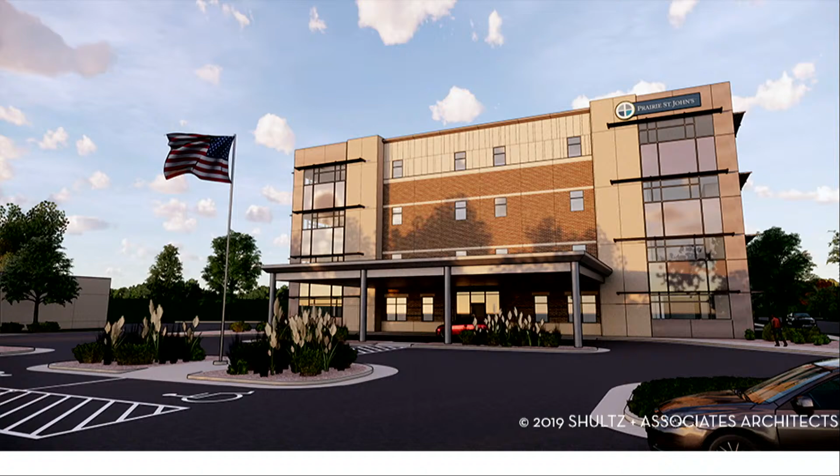Here's the rendering. It's close to this look right now. We still have that front piece to finish. So this is our wrap up front canopy. We're just adjusting a little bit to the approach. We'll move a little to the west.

Just a little bit about Prairie St. John's to set the stage here. Prairie St. John's is a fully licensed 132 bed behavioral health facility, serving adults and children. We also have partial hospitalization for our outpatient programs, and we've also grown our sustainable or supportive housing. We've opened up a second building for that, for people enrolled in our outpatient program. The vast majority of our patients are from the local Fargo-Moorhead region, and we serve Minnesota, North Dakota, and also bordering states.

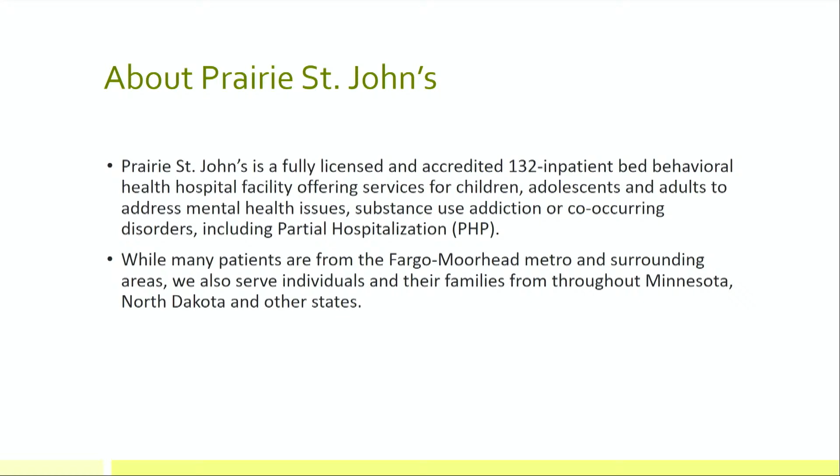So to get into what we were requested to visit about, we're proud to report on the demolition materials that we've been able to recycle. I'm sure many on this committee are interested in this and know some of these facts, but 30% of overall waste worldwide can be attributed to construction waste. So by diverting this from landfills, it certainly adds life to the landfills. The primary materials we recycled on site were masonry, asphalt, concrete, and metals.

And there was some salvage of equipment that was past its useful life, but found new life elsewhere, such as a couple older generators — the demolition company was able to move those on to new homes. As you can see, the benefit for us was not needing new materials hauled in. We had considerable fill that was needed, required to bring our parking lots up to an equal grade to the building.

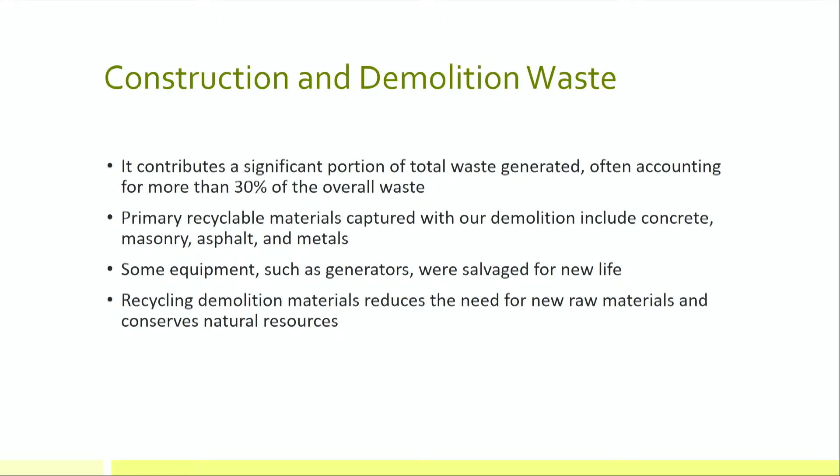So I'll go through a few slides that folks have driven by and watched as we've started to demo this spring. Much of this, there's quite a bit of abatement that happened last fall. So when springtime came, we hit it pretty hard in early April.

You'll see that they start to separate on site. They'll start to separate the metals, and there's a combination of crushing. They'd bring down the big slabs. A lot of it was poured in place slabs. Bring it down, crush it, and then pull out manually with their equipment, pulling out metal.

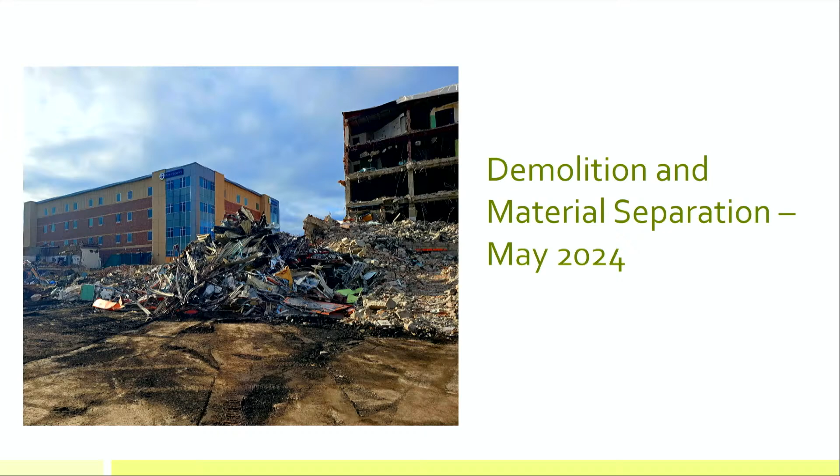And here you start to see that we're down to the lower foundation. We've got a large pile of metal up front here.

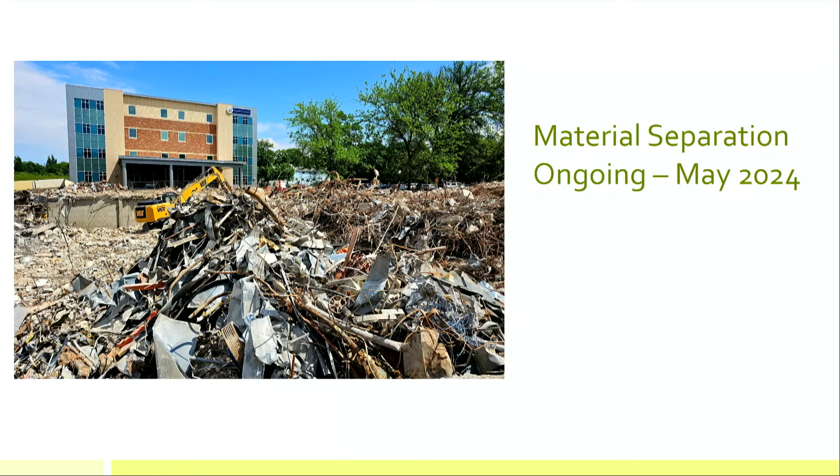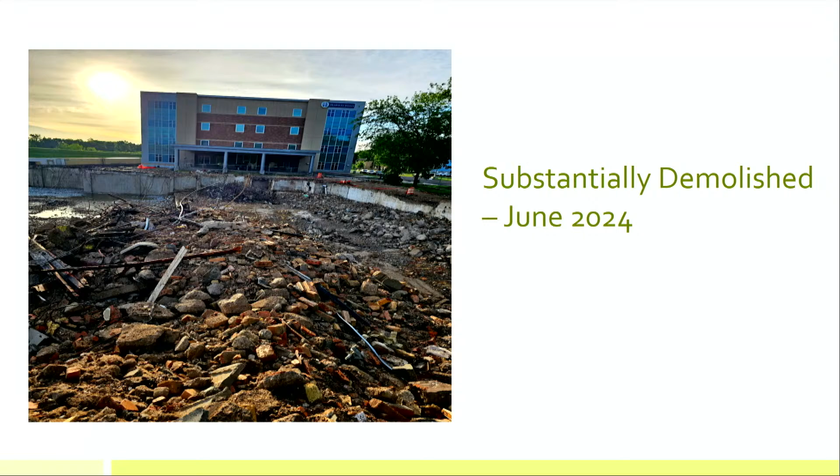We were considered substantially demolished in the latter part of June. There was a little bit of a lull in time as we waited for some of that crushing equipment that you see actively on site now.

Some of the materials, it was fun to work with the contractor to tally up what these ended up, and some of it's still growing. You'll drive by now, there's still metals that are being pulled out of the crushers. So there's quite an extensive pile of metals out there right now.

The asphalt equated to 4,100 tons of asphalt. That's been crushed, and that's actually starting the next phase - I apologize, that's the next phase where the concrete is wrapping up in the next week.

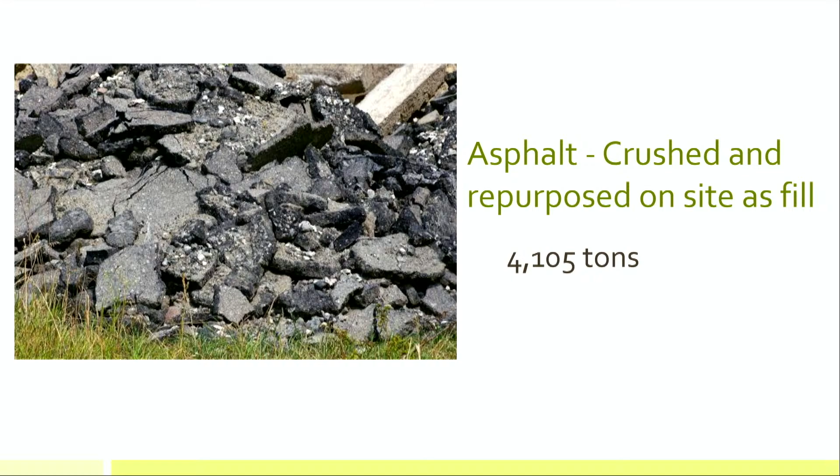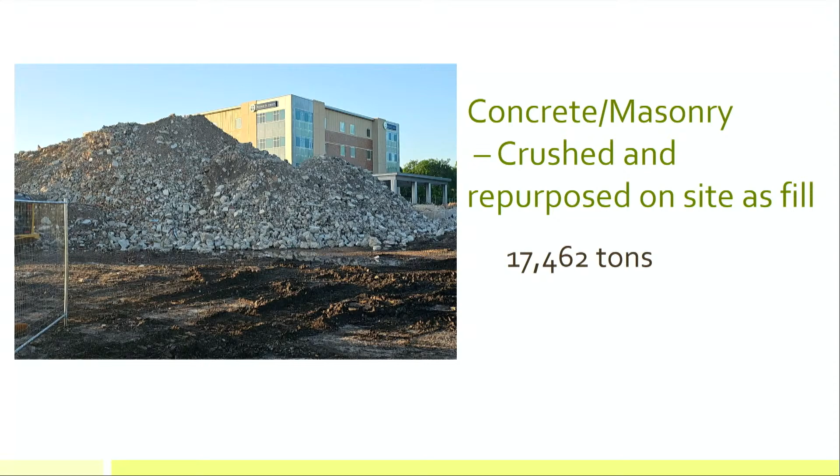This is a relatively recent photo. It looks similar today. The pile's getting bigger, but at some of the depth of that fill - this is the crushing and the active dozers getting the compaction in there, and we're at 96, 97% compaction. Some of that depth is at 12 feet up towards the canopy, where the foundation was and where the basement was. So it gets to be quite a depth.

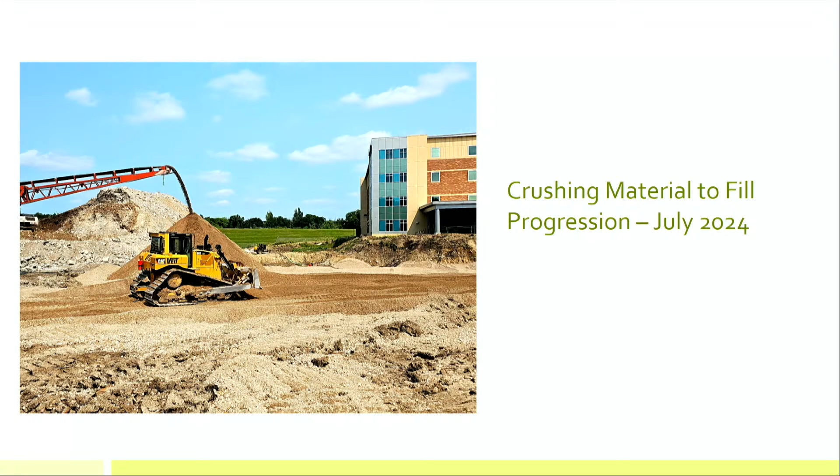Some of the additional impacts you try to quantify: 568 estimated semi-trucks to haul if we would have hauled that off-site. Nearly 23,000 tons of construction demo out of there. Like I said, some of that's still growing, with some metals being hauled out in the next couple of weeks.

Landfill diversion extends the useful life of that. Reduced labor - high demand, there's a lot of construction going on in town. We're in a massive shortage of drivers. Road wear - obviously alleviate the wear and tear on that.

And those 568 trucks, that's one-way traffic. So that's going two ways to and from the site, so you can double that. And then also just the delivery simply of bringing new materials, raw materials back to, if it would have been class 5 gravel, whatever product we would have used. So that would have been additional traffic back to the site.

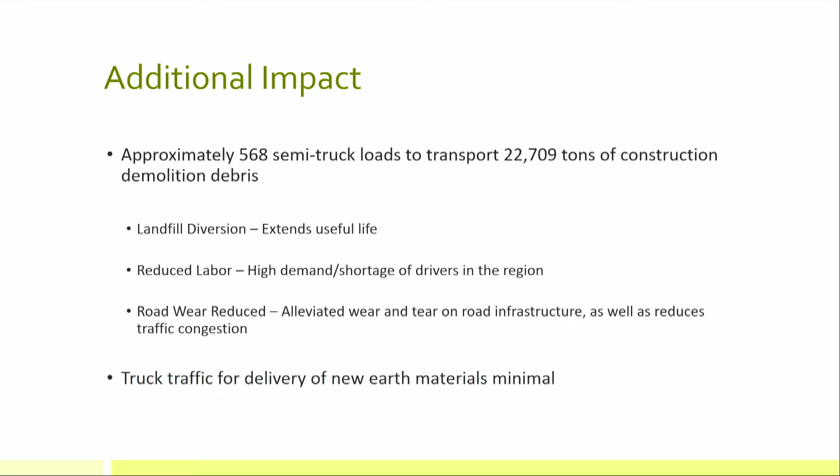So that concludes what I have. If anybody's got any questions, I'll take them.

I may or may not have them. I could come back.

Matt, what were your financial considerations when you're weighing whether to recycle and reuse or to just throw to the dump? I was not there during some of that initial - I've only been with Prairie for 4 months, so I had missed out on that really front end of that.

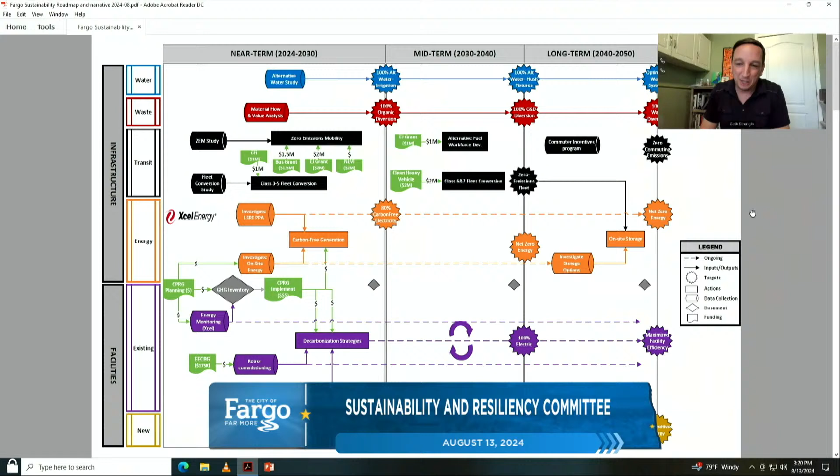Yeah, great, thanks so much, Bruce. I really appreciate it. And really, what a fantastic project that Matt and the Prairie St. John team have going on there. Kudos all around on that. And that is a great example of taking advantage when an opportunity presents itself.

As Bruce said, we can also look forward strategically, so we can start to plan the actions and steps the city can take to try to realize these sustainable outcomes we've mapped out. What I wanted to do today is walk through this roadmap you're looking at on the screen. As Bruce said, attached with the packet is a narrative explanation, but I want to take this time to walk you through it so you can gain an understanding of what this is saying. If you have questions, you can read back through the narrative, and we can address any questions as they come up.

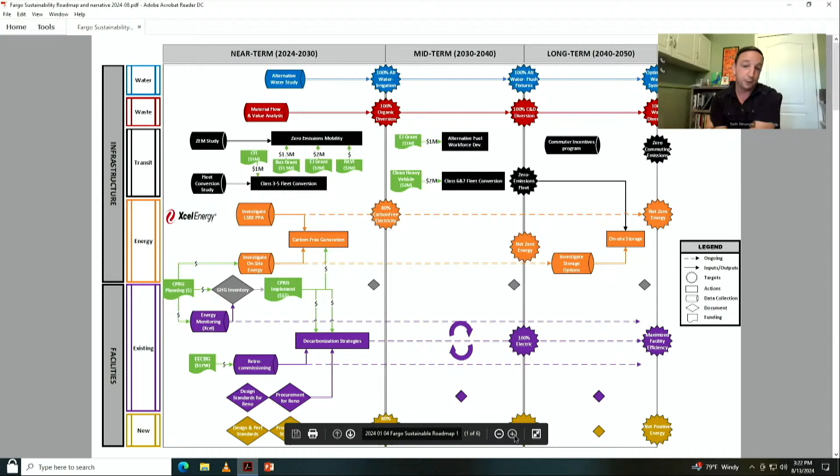So what I first want to do is orient you to how this is set up. If you move from the left-hand side of the screen over to the right, you'll notice that in the far left we're categorizing the city's operations, the elements the city is involved in where there's an opportunity for sustainability. We're breaking that into two categories: one is infrastructure and the services that infrastructure provides, and the other is looking at facilities that are city-owned and public facilities.

As we move left to right, after thinking about infrastructure and facilities, there are different subtypes within there. There are various areas of the city's infrastructure with opportunities to improve sustainability performance: water, solid waste, transit and transportation, and energy. When we think about facilities, we can split those into your portfolio of existing city facilities, and also new projects designed moving forward, or standards to put in, like the lessons learned at Prairie St. John. If there were lessons to carry forward into city policies or codes, that would be looking at new forthcoming facilities.

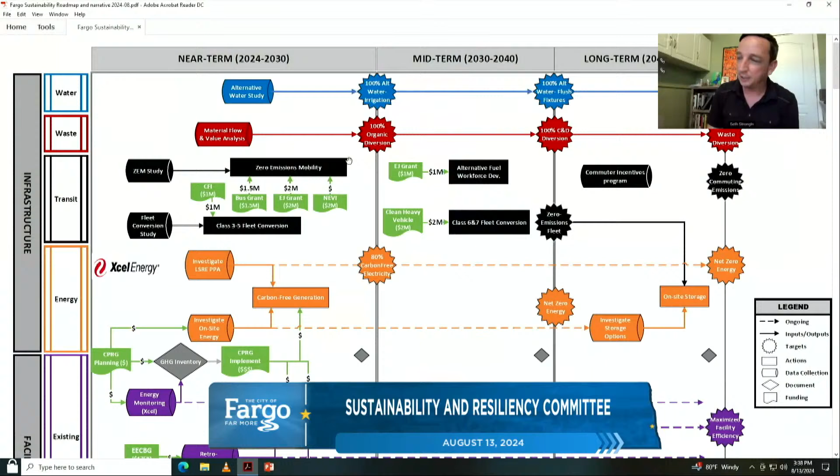Absolutely, yeah, and it's an excellent question. So it's definitely not a bad question at all.

My guess is the frame for that is looking at if you have an existing structure whose current use is not going to continue, but you want to replace it with a new structure. The conventional way of doing it would involve demolishing the existing facility and all the waste created from that demolition process.

Let's assume there is no construction and demolition diversion and recycling going on. So you've created a waste stream and products going to landfill that previously weren't needed. But then on the back end, by building a new building, you're bringing new materials to site, transporting those materials, and the process of making those materials has an environmental impact. So it's almost like a double hit where you're creating a waste stream from the demolition, but also creating an environmental footprint by building a new building and the materials that go into that.

So in theory, if it's able to reuse facilities, or to do construction and demolition waste recollection and break it down to its raw materials and put that back into a raw material supply, now you're making that a more efficient process. Instead of sending those materials to landfill, you're using them to help contribute to that next structure that's going to be there. So you've made a more materially efficient process. My guess is that's what they were getting at with that one.

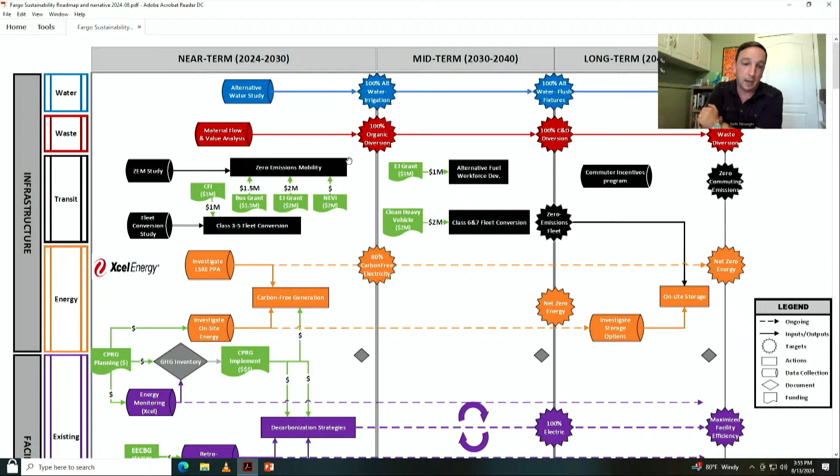When we look beyond just the energy providers themselves, as we start to think about the facilities—this is a bit of the transition into the bottom half of the roadmap here—there are also opportunities to think about what energy can be generated on site. And that has an added bonus of not only being an energy source that is potentially low to zero carbon, but it also can improve energy resilience.

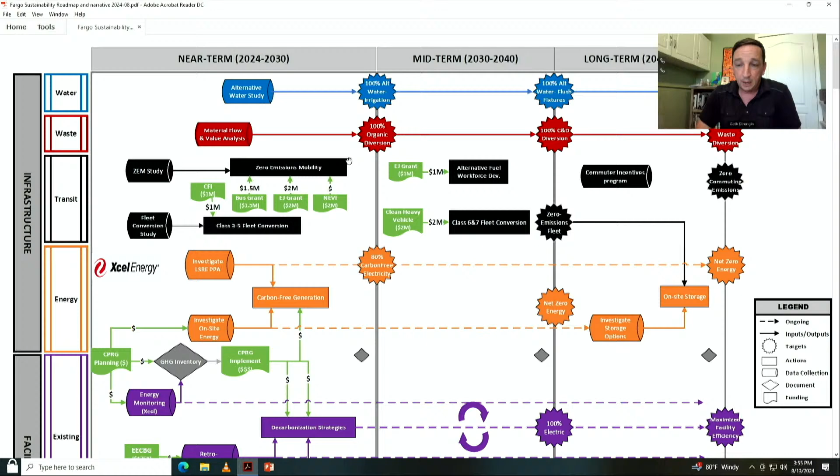So if there was an outage on the grid and facilities had their own on-site energy generation equipment, if they had some form of storage or had designed the system to be able to reuse that directly on site, then in the event of these outages or any disruptions, there would still be a power supply available, and of course that would be a clean power supply.

So I think that what we recommend is to look into a combination of partnering with the energy providers, as well as taking a look at where there are opportunities for on-site generation and distributed energy resources. And the outcomes that we hope to see from there, we do think that there's a lot of opportunity in the short term to realize significant benefit.

It's going to be hard to get all the way to eliminate emissions from electricity in the next few years, but we do think that significant progress can be made, and that by 2030 you could realistically achieve something like 80% carbon-free electricity or zero carbon electricity.

And then the more challenging sources to mitigate, or those factors that are using energy that's difficult to find a one-for-one replacement for, can be kind of gradually addressed over this next decade, so that by getting down to like 2040, you really can be approaching and getting to net zero energy, meaning that the amount of zero carbon energy produced is equivalent to the amount of energy that's being consumed.

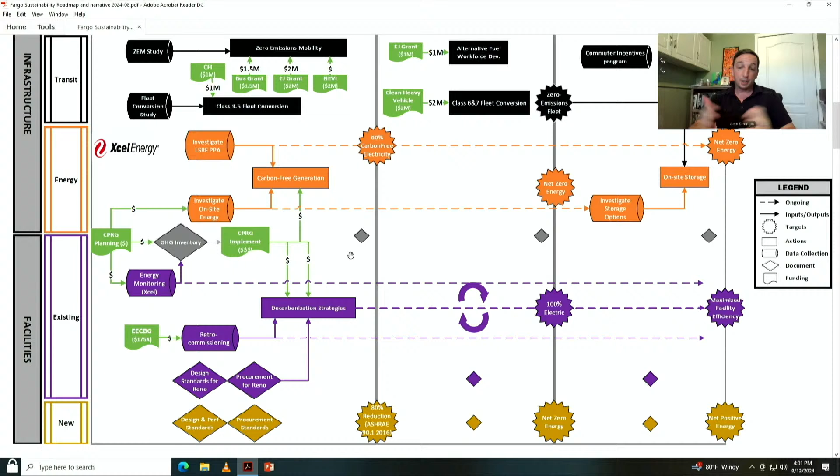And so even though there's certainly an understanding of what facilities are here, we need to get a facility-specific understanding of how that facility is using energy, and then that will help to identify opportunities to improve performance. But it'll actually also identify the biggest bang for the buck, the places where you should prioritize action so that you'll realize the greatest impact from the investments.

There's already been significant activity in that space. As Bruce mentioned at the outset, the EECBG funding has already been put to use - Becky has been able to wrangle some of that funding toward productive uses to improve the performance of existing buildings and make specific improvements in specific facilities. Unfortunately, the other funding source listed here, CPRG, the US EPA's Climate Pollution Reduction Grant Program, just announced their most recent round of awards within the last month, and Fargo was not awarded any funding through this round. That doesn't mean there won't be future opportunities or similar programs, but I wanted to point that out as a recent development since this roadmap was first developed.

Yeah, absolutely, and that would be a great use. Lighting is often one of the first places we look to find savings in terms of energy usage, and I do believe there will be future funding programs available. It's unfortunate this round didn't come through.

Does anybody have a sense of that - is it a political deal, or just...? I don't have direct information and would hate to fully speculate on all the decision-making criteria. But one non-scientific observation is that the programs that got funded tended to be quite large, so maybe there was an element of wanting it on a grander scale than what had been proposed here. Again, I hesitate to weigh in on specifics, but some programs were funded up to hundreds of millions of dollars for a single program, so perhaps eyes were on those bigger ticket items. I'm not sure. Well, at least we're shooting for the stars and aiming for things, and sometimes it'll stick.

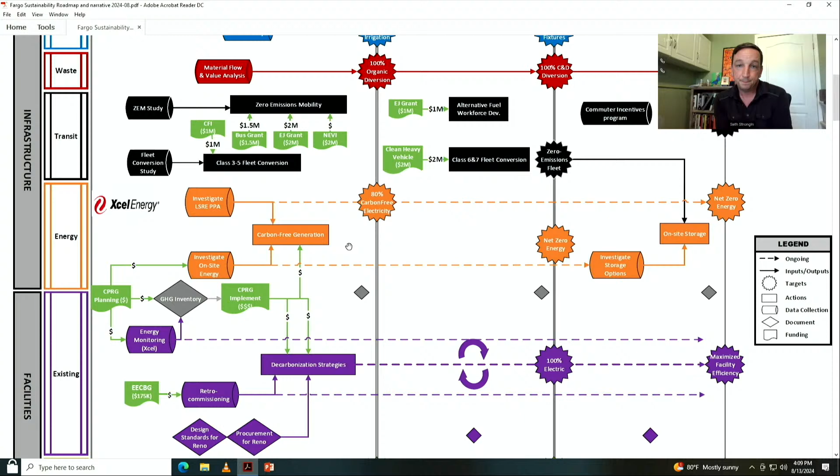Seth and Brian, thank you really sincerely for this information. It's a lot to process and unpack, but it's a roadmap and a way forward. What I look for in there is opportunities for funding. If we can pull access to grants or funding out of these efforts, that'll really move us forward more quickly.

Bruce, anything else? Greta, go ahead. Strongly agree, this is just a little confusion on my part, but in your facilities section under the near term, where you've got the purple diamonds that say design standards for Reno and procurement for Reno, what does that mean?

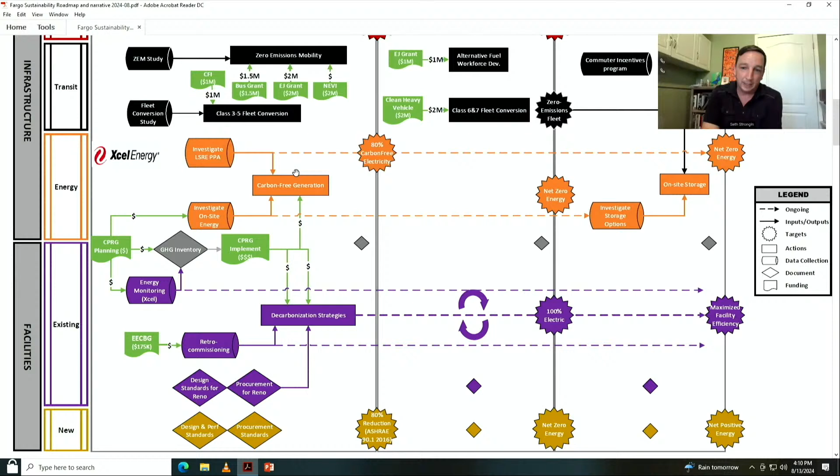Yeah, sorry, we ran out of physical space. RENO is an abbreviation for renovation. So when you are looking to renovate, say, City Hall or a library facility, much like I was talking about creating design standards for new facilities, you could also come up with those ideas for any renovation projects and retrofit type projects that happen.

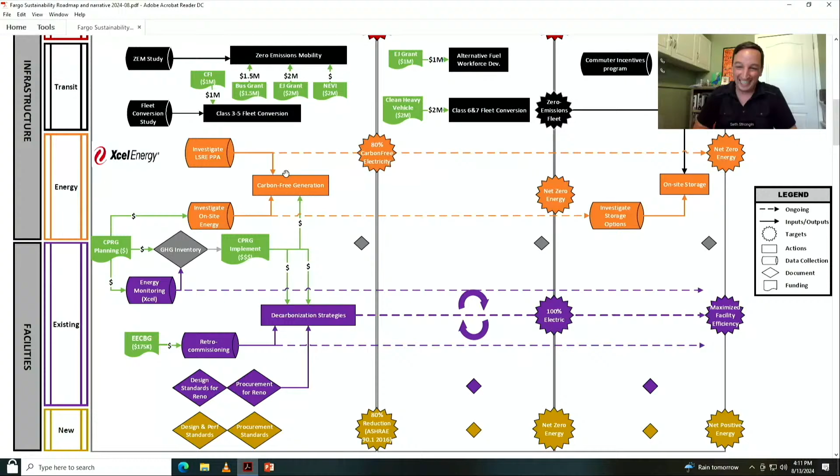You know, Seth, one of the benefits of us hearing and connecting like this is we have the Parks District here, we have the school district here, we have the city here. So wonderful, this information will ripple out, and I'm sure it'll have actions and implications that will add up through time, because they're here with us at the table.

All right, Bruce, anything else? Wonderful, on this, thank you very much. Anybody have any other questions or feedback for Seth and Brian? Good stuff. Okay, anything else, Bruce, on that topic?

No, thanks for everybody's time. That's a mouthful there. You know, here we have the former Public Works Director, City Administrator, current Public Works Director. This is a language you guys know pretty well over time. Mike Williams was involved with these things years ago and still here at the table.